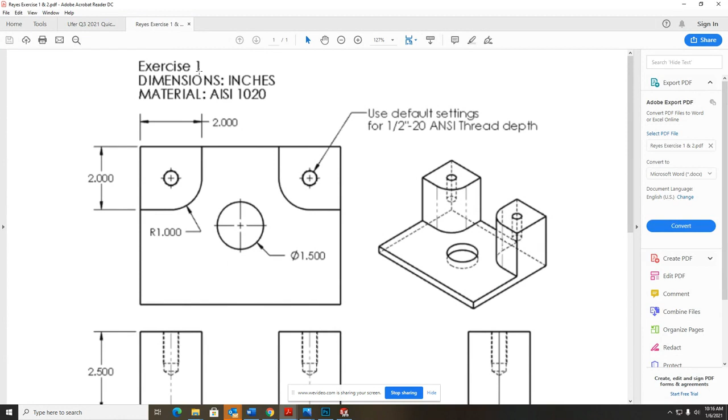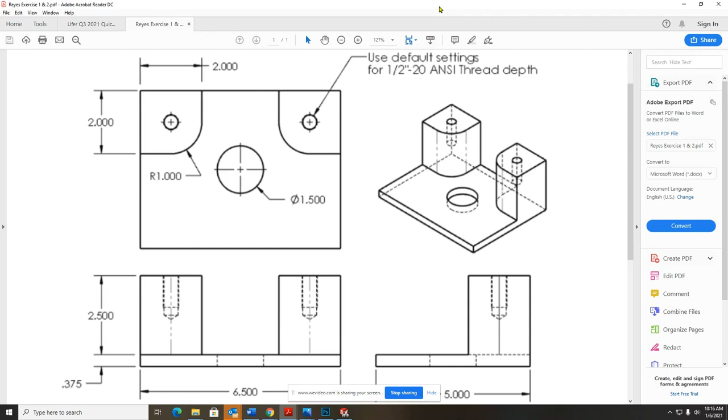Okay, so this is the Reyes Exercise 1, this part here, and I'm going to make it in SolidWorks. And here it is finished, but I will start from scratch. Okay, so starting from scratch, parts, new.

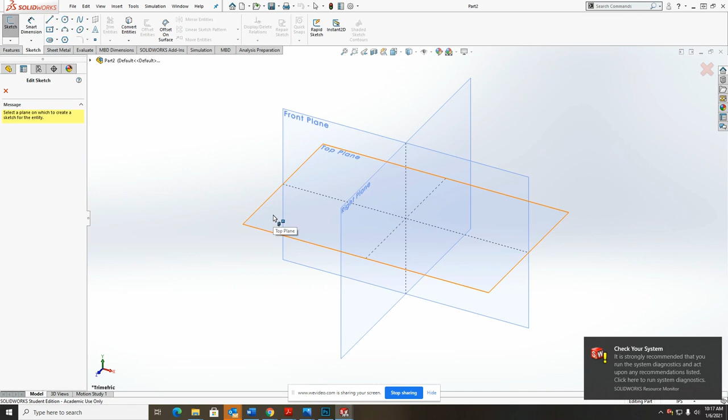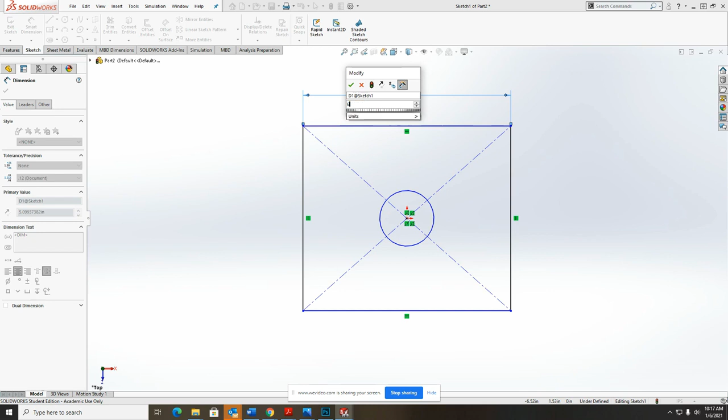Sketch. In this case, there's a hole in the center, so I'm going to start with center circle or center rectangle. I can add that circle right now if I'd like. Smart dimension. This is 6.5, 5. And 1.5 inch. And the distance is 0.375.

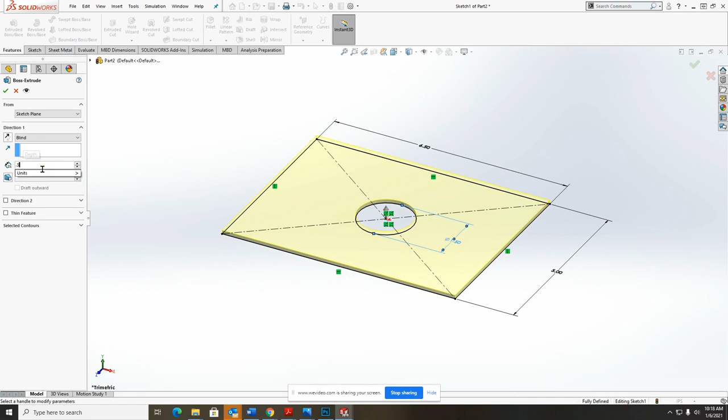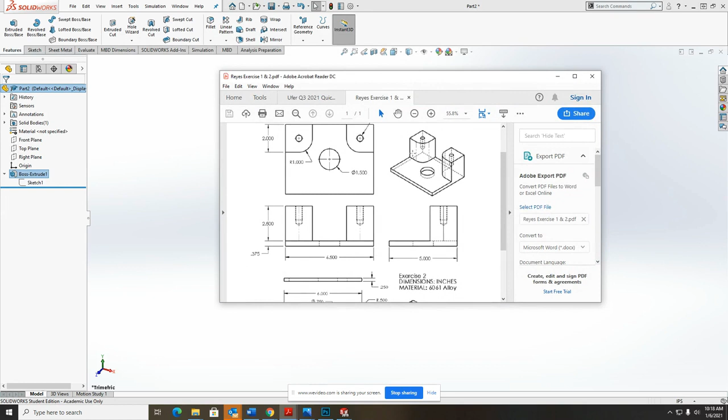There's feature 1, sketch 1. Sketch and feature. Now I'm going to add those two projecting elements coming out of the top of that. And this time, it doesn't make sense to use the center rectangle for this, so I'm going to use the corner rectangle. I have to choose a plane. I will choose this plane. Start in the corner.

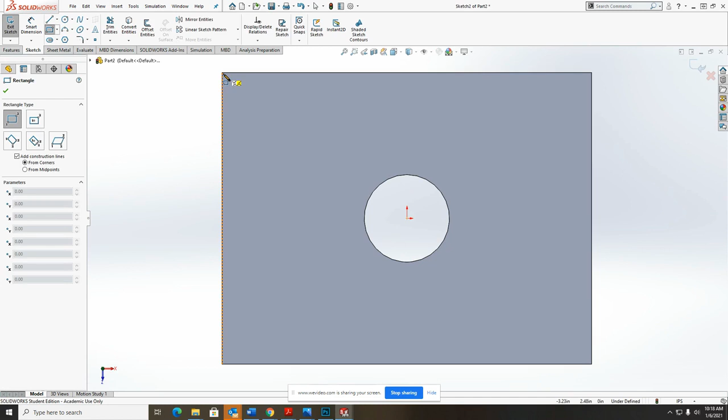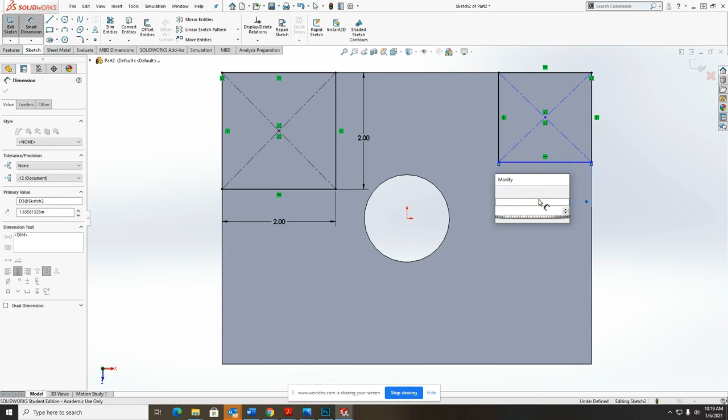And smart dimension. I could add some relations to this, but it's just as easy, since it's only a couple of dimensions, to dimension all four. Fully defined. We want all of our sketches to be fully defined before we continue. Feature, extrude. Let's see, that needs to go 2.5.

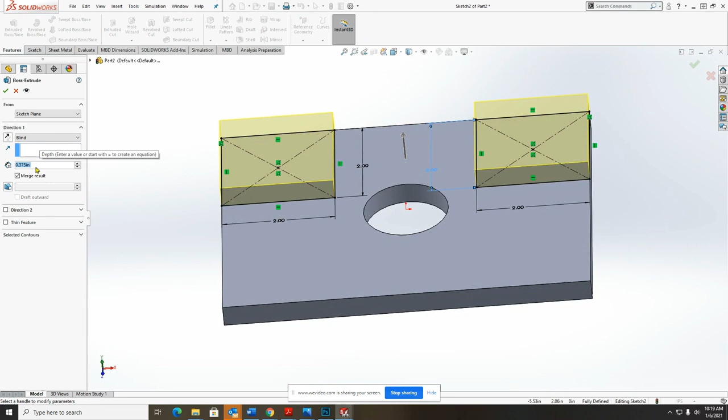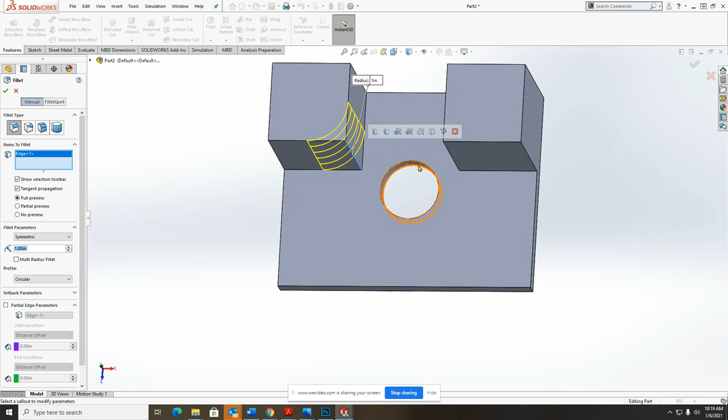And now I'm going to add the fillet. I could have added the fillet on the sketch. I like adding the fillet here. And this fillet is a 1 inch fillet. Here, check mark. So now I have 2 sketches and really 3 features, the fillet being one of the features. One more feature, and that's the hole wizard.

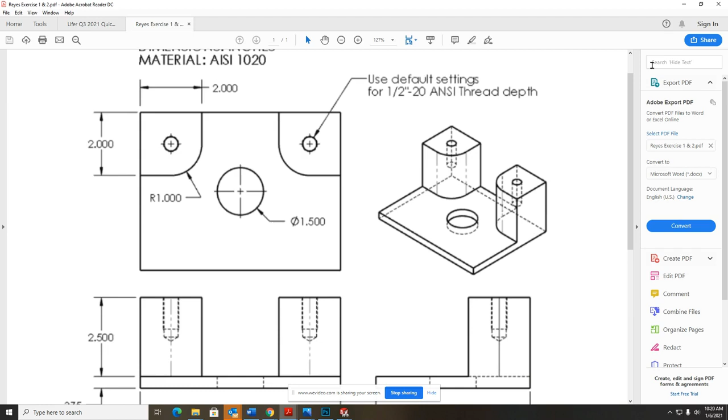In this case, it is calling for a 1/2 inch by 20 ANSI threaded hole, which is the default depth, it says. So this is the trickiest part of the hole wizard, is getting the right hole. Okay. In this case, we're going to use a tapped hole and a bottom tapped hole. Lots of choices here, but it tells us they want a 1/2-20.

Okay, once we have the correct hole, lots of options here. A few things you want to be careful of is if my cursor is, say, over that and I just roll my mouse, it switches. So you really want to double check. You can see I'm just accidentally slightly touching my mouse and it modifies this. So we want to make sure we have the right one. Okay. Then we go to position.

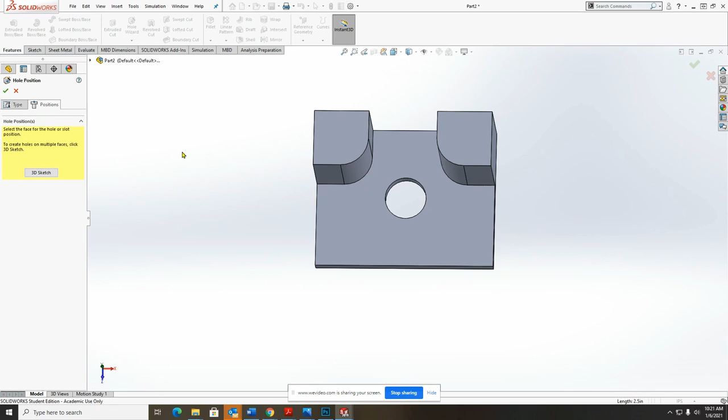Position is relatively simple when you understand it. The first is choose the face. If I chose here, it would put the hole on this face. If I chose here, it would put the hole on this face. I want it to be on this face. I could add it anywhere on this face and then go right up here to Smart Dimension and dimension it.

But in this case, it is the center of that arc. So if I hover over the arc before I click, it shows me the center, and I can snap it to that. And I can do the same thing over here. I could place it right here if I clicked, but I really want it on the center of that arc. So I hover over the arc. And now I check mark.

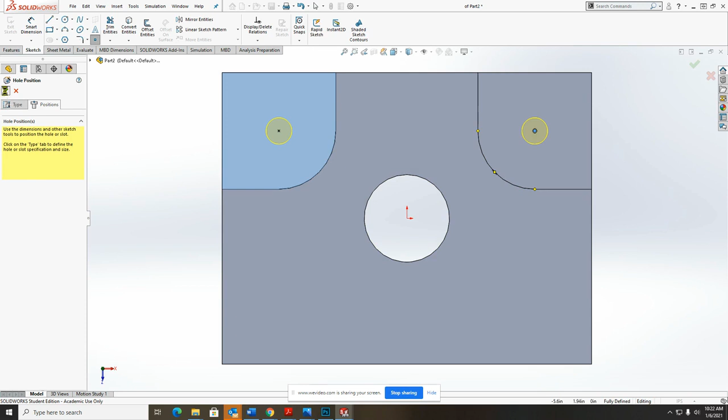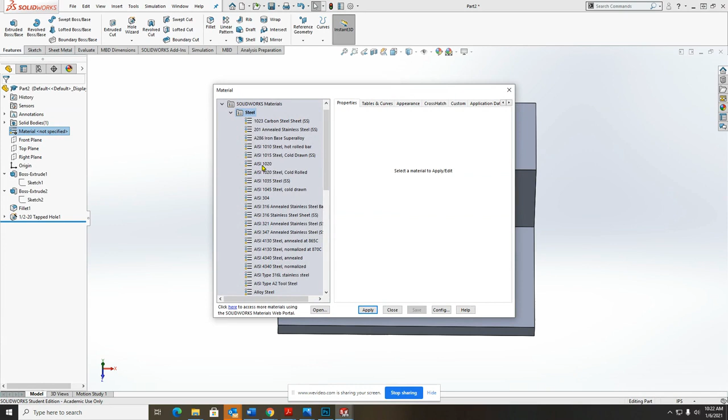And one last thing, and that is to get the right material, AISI 1020. Right click. It's not on our short list here, so we can edit material. And that is a steel. Here it is here, AISI 1020. Apply. Close that. Here it is, the right material.

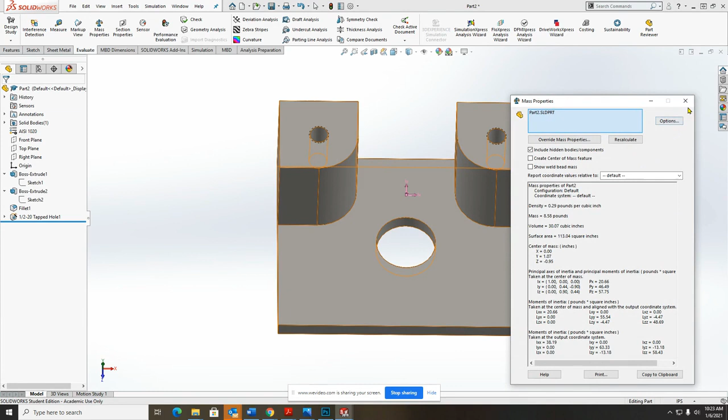I think I did all the sketches right. They were all fully defined. And now we can check the mass. Evaluate, mass properties. 8.58 pounds. Submit that and we're good to go.